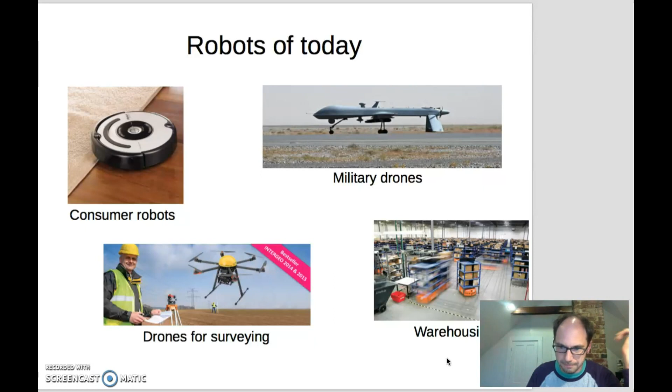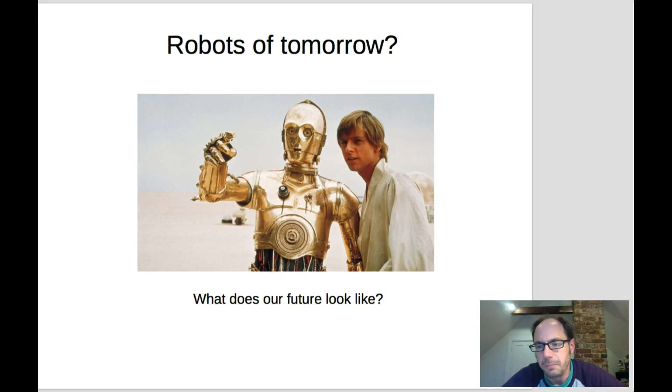Great. So we've talked about all the applications that robotics have had today with today's technology, but most people expect that this is the tip of the iceberg. That really there's just a huge future for robotics. So now I want to spend some time thinking about what the applications of robotics are going to be like in the future. So obviously the autonomous car is a big one.

So I have several friends who are busily engaged in startups that somehow relate to autonomous vehicles. And autonomous vehicles has been a dream of AI and robotics for literally decades. There have been papers since the 80s, folks trying to develop methods that go after some aspect of the autonomous driving problem.

And it turns out that in the mid-2000s, there was a series of these things called the DARPA Grand Challenge. These were competitions sponsored by DARPA that really demonstrated that a lot of the underlying capabilities that were necessary in order to develop an autonomous vehicle had actually arrived. And this is something that I'm going to touch on again multiple times over the next several slides. For an application like autonomous cars, there's a lot of underlying capabilities that are needed in order to make that possible.

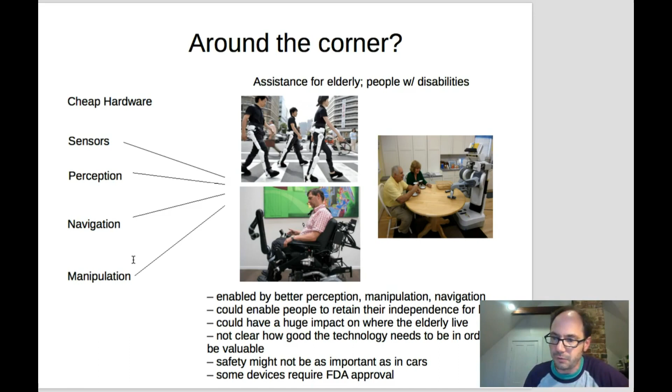As with the other technologies I mentioned, a lot of technologies have to come together in order to make something like this happen. So these in-house assistants need inexpensive but good sensors. They need good perceptual algorithms. They need good planning and control. And now something new, they require some degree of manipulation capabilities because they're going to have to do tasks in the house.

All right, let's look at another application. So manufacturing, packaging. Robots in manufacturing facilities have really been going on for several decades now, since the mid-'80s, really. So since the mid-'80s, we've been gradually introducing more and more robots into the workplace. And this is having a very profound impact on the efficiency with which we can produce items.

So, it's often said that in the United States, we don't do manufacturing anymore. We used to do manufacturing in the 60s, but now it's all service industry. It turns out that's true in one sense, but not true in another sense. So it is true that many fewer people are employed in manufacturing.

But what's not true is that the amount of goods produced by American manufacturing today is actually higher than it was in the 60s. So what we've done in the United States, at least, is we've reduced the number of people employed to produce some number of goods, but we've actually increased the number of goods that we're producing. So essentially the efficiency with which manufacturing operates has just improved dramatically since the 60s. And a very large chunk of that is the introduction of robotics into manufacturing.

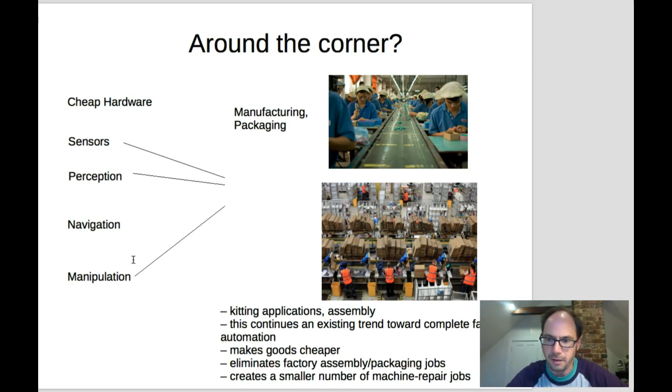So Amazon is very focused on improving the efficiency with which orders can be fulfilled. Essentially that means the efficiency with which items that you ordered can be placed in a box and shipped off to your house. So the more efficient that process becomes, the more profitable a company like Amazon becomes. So there has been and there will continue to be a lot of innovations along these lines.

Okay, so here we're back to domestic assistants again. I talked briefly already about how there was a significant role for robotics in domestic assistance, in assisting people with disabilities and the elderly. If you can do those things, there's a huge role for robotics in a variety of other personal or domestic applications. So robots performing tasks like the Roomba, but more sophisticated tasks. Instead of just vacuuming, maybe some household robot is going to be able to do your laundry, do a better job with your dishes, do whatever sort of maintenance tasks around the house are required.

And again, there's a variety of different technologies that need to come together in order to make something like this happen. So in order to get these assistants in our houses doing stuff, for one thing, we need really cheap hardware. Today's robotic arms have come down in price significantly from what they were, but they still cost tens of thousands of dollars. We need to get our robotic arms down to a few $100s in order for these things to really become competitive in the house. And of course, the same thing goes for sensors.

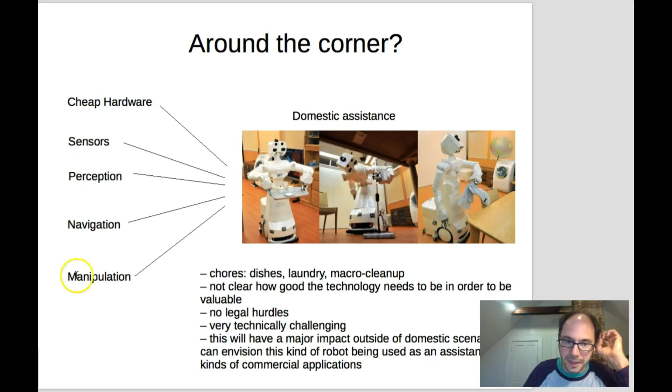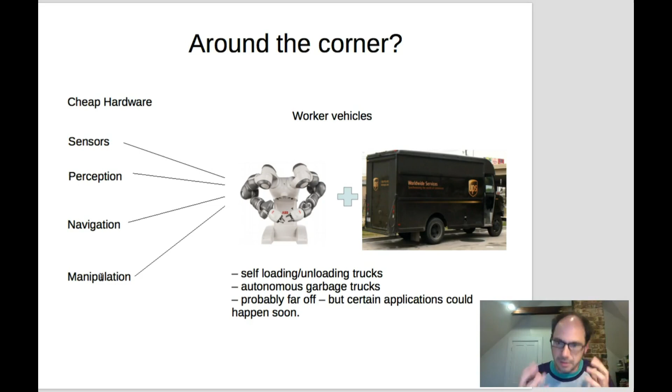All right. Onward. One could imagine the same type of technologies helping in other areas as well. One might imagine marrying some sort of manipulation capability with an autonomous vehicle capability, and you could create maybe autonomous trash or recycling handling. You could create autonomous package delivery from trucks. There's just a variety of things that could be automated with a combination of these various different things.

Okay, all right. So there's all these technologies that maybe will become possible in the future, and of course, the question is when. I think it's very likely that all of these things will happen someday.

Probably within the next couple of decades. But of course, various things will happen sooner than later. So starting with the autonomous cars, there's a lot of people betting that autonomous cars are going to become a thing in the not so distant future. So there's a lot of people betting that autonomous cars become reality in 5 years and not 2 decades.

So I already mentioned how drones, or at least the kind of smaller drones that we would be talking about for commercial purposes, depend on advances in battery technology. I don't know when that's going to happen. So those applications might be limited because of that.

Things like the applications in the house and the warehouse, the applications in personal robotics, the applications in assistive robotics, I think these are some of the most exciting applications going forward, because these applications are a little further out than autonomous driving, probably. And the reason for that is because these applications in the house require some degree of manipulation.

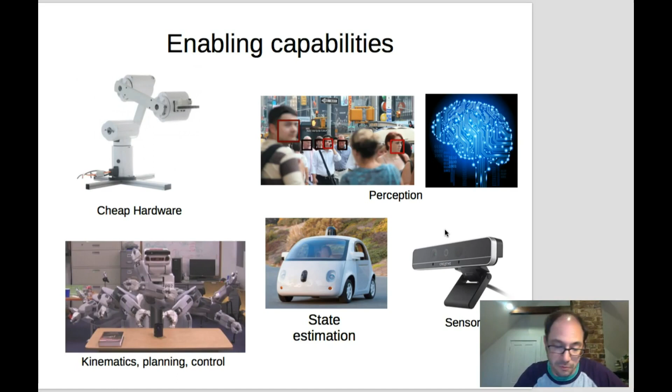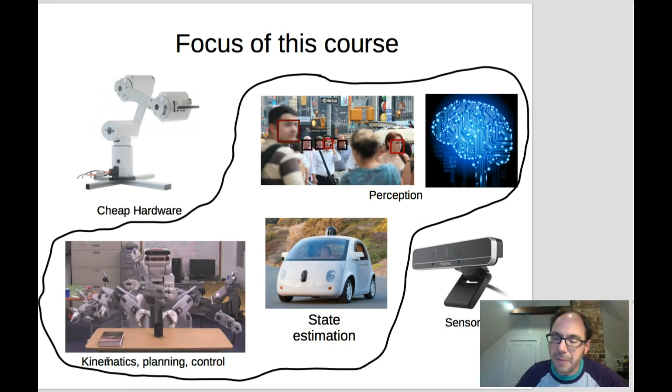Now, this is a computer science course. Our focus is on these pieces of it. We're not going to talk about the hardware or the sensors. Those are really important things, but our focus is going to be on understanding the fundamental algorithms. I can't cover everything that you need to know in these areas in one course. But what I can do is help you understand some of the fundamental algorithms: two or three planning algorithms that are fundamental, a fundamental control algorithm, the fundamentals of kinematics, and this will give you a good basis on which to understand a lot of other stuff. That's basically what I'm after in this course.

Right, and the other thing that we want to try to do is introduce you to some contemporary work going on at Northeastern in my lab, but also in some other robotics labs at Northeastern. The idea here is that the stuff on the prior page introduces you to the state of robotics up until now, and by looking at the research topics that we're currently writing papers about, you can get a sense for what things look like going forward, and more sense of the direction in which robotics is going.

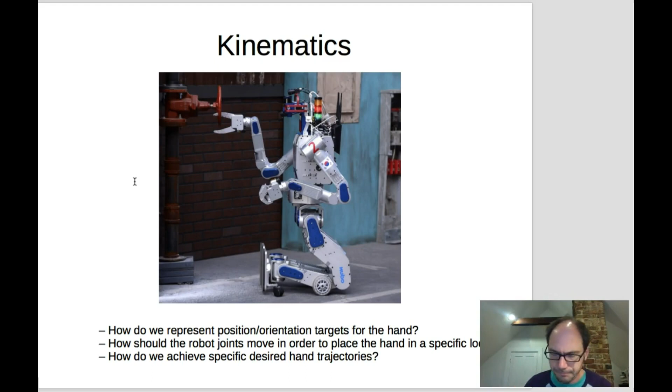Okay, then we're going to move on to planning and control. So this is, I guess I would say, probably the most important topic in robotics. Perception is right up there with it, in my opinion at least, but planning and control is really fundamental. So the problem that we're trying to solve here is we want to plan or otherwise create a controller for moving the robot in order to perform some task.

Okay, so I just got finished telling you that we needed to solve some inverse kinematics problems in order to do that. That's true, but that's not sufficient. We need to do even more. And the problem is that if we just blindly move toward a satisfying set of joint angles that gets the hand there, there's no guarantee that the robot's not going to collide with a bunch of objects on the way over there.

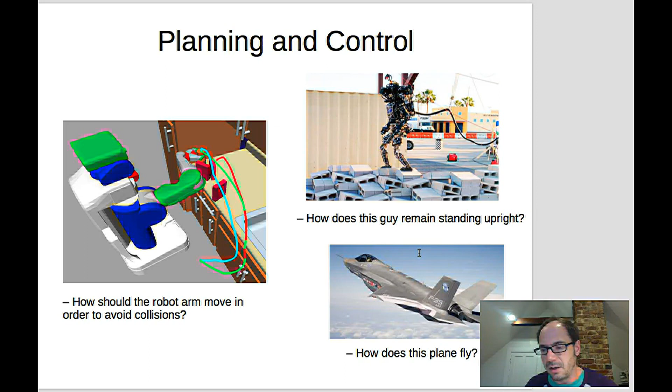All right. Okay, another topic that we're going to study is state estimation. Again, this is a topic that's been studied in engineering for a long time. It's something that is really critical in robotics, and I'm lumping a lot of different ideas under the title of state estimation. Fundamentally, what we're going to study here are things like particle filters, Kalman filters, methods of estimating robot state based on noisy sensor information.

I should back up and say the problem that we're trying to solve with state estimation is to turn our noisy robot sensors, that is, laser sensor output, sonar sensor output, camera sensor output, into something useful. In order to use that in the context of planning or control, we need to make sense of it and turn it into reliable estimates of the quantities that we need in order to make our robot do its thing. That's exactly the problem addressed by methods like particle filtering and Kalman filtering. In general, the problem is very challenging, and particle filters and Kalman filters are some of the more popular techniques for approaching it.

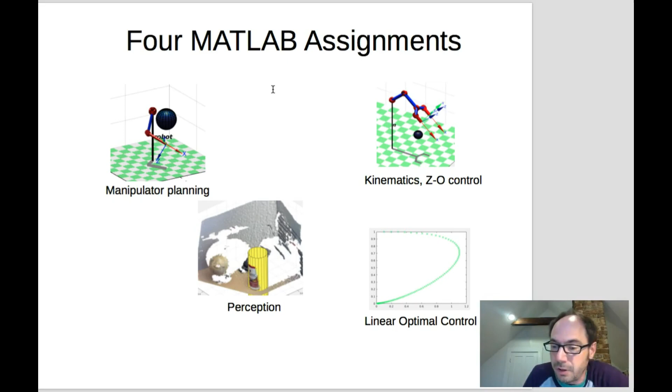In order to do those MATLAB assignments, you're going to need to have access to MATLAB somehow. If you've never done MATLAB, that's fine. Again, you just have to be willing to get it installed and learn how to use it. MATLAB, as a programming language, is pretty straightforward. It's not a challenging language to learn, but if you don't know it, you're going to have to be willing to spend some time. If you don't have any programming background at all, I think that might be an issue.

Okay, and then the final project is going to be a directed project that's going to involve interfacing with OpenRAVE. OpenRAVE is a robotic simulator that we use in research in our lab. So creating a project with OpenRAVE is about the closest I can come to having you do things with real robots without actually having you do things with real robots. The OpenRAVE robot is essentially the same as the real robot, but it's in simulation. And these days, everything gets done in simulation before it gets tried out on the real robot. So I think this is an appropriate focus for your final project. We use OpenRAVE in just about everything we do in my lab, so this is very current in terms of research.

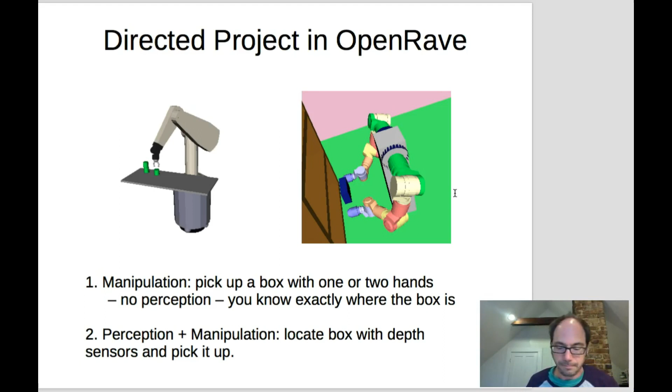Okay, so in order to use OpenRAVE, there's potentially some challenges with the software. I did this last year and it didn't present too much of a problem. Basically, in order to use OpenRAVE, you need Python 2.7 or something thereabouts installed. I don't think it's going to work with the latest version of Python. Ideally you're going to be using Ubuntu 14.04 or later, but I believe you can get this system working on Mac or Windows platforms as well, though there can be additional systems challenges in doing that. So in doing the final project, there's a potential for you to need to spend some time getting OpenRAVE and Python installed on your system. All right.